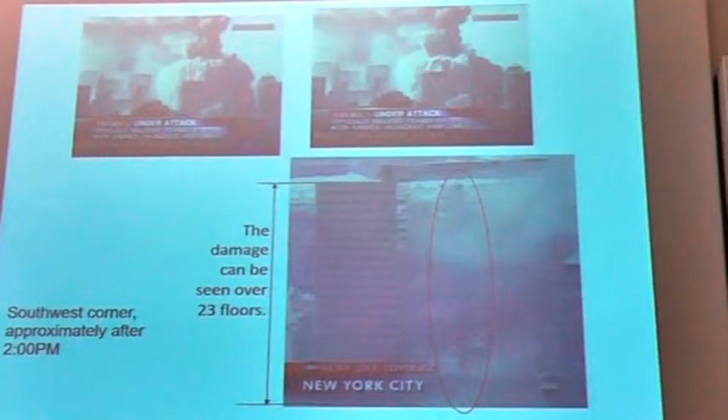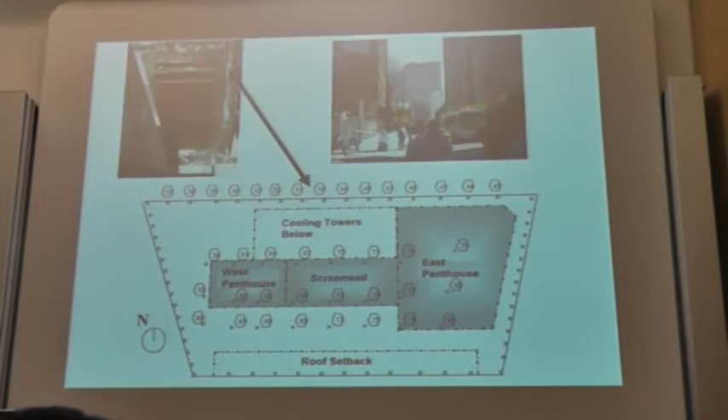So there again is another picture. This is the top of the building. You'll see here, this is the North Tower - so what you're looking at is the North Tower down here, this is the World Trade Center. In this view, you're looking towards this elevation, and you can see the east penthouse here, at the top there.

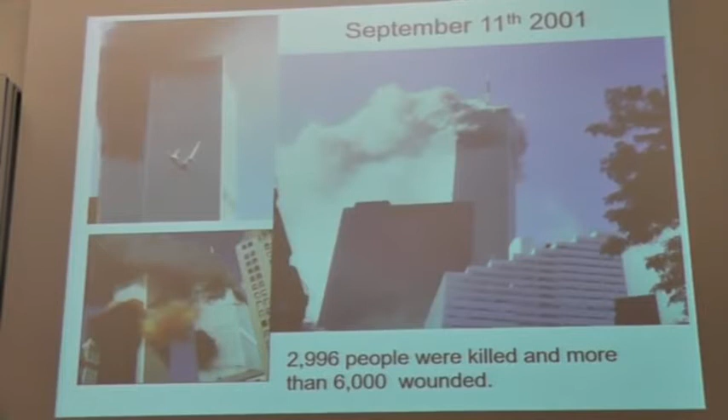So of course, September 11th, 2001. Those that are old enough can remember that awful day. Just short of 3,000 people died, and more than 6,000 people were wounded as the planes were deliberately crashed into the two towers.

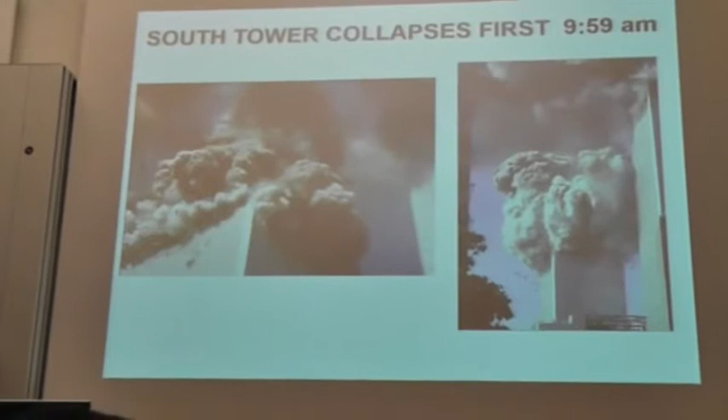The South Tower, which is the furthest one away from World Trade Center 7, collapsed at 9:59. This is classic progressive collapse, where the building all comes down in one go, and we'll talk about progressive collapse as we go through the presentation.

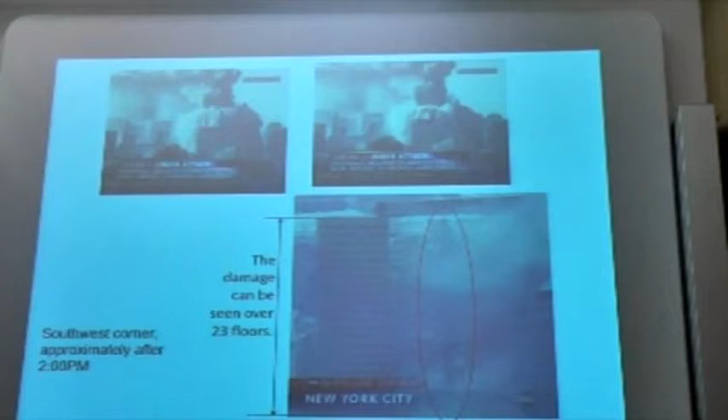Not many pictures were available of the damage to World Trade Center 7, but you can see here the North Tower as it came down gouged through World Trade Center 7. That was the structural damage you see there, which can be seen over 23 floors. It then obviously caused a fire, and the fire burned for 7 hours.

It was a classic travelling fire. We will look closely at where the fire started and how it travelled throughout World Trade Center 7.

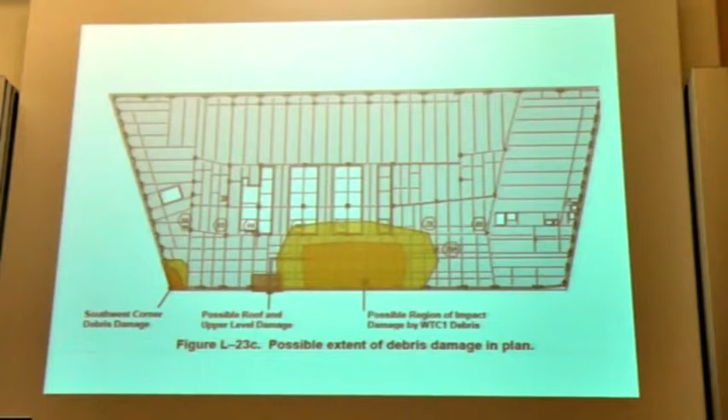If you look at the plan of World Trade Center 7, this was the North Tower, World Trade Center 1. This was the extent of the damage we could find, with damage on the southwest corner. That would not cause collapse—it was superficial damage, but it did start the fire.

Debris from the collapse of World Trade Center 1 at 10:28 ignited fires within World Trade Center 7. These were standard office fires—there was no jet fuel, only superficial structural damage that started the office fires. The fires travelled through the building for 7 hours, and collapse occurred at 5:20 p.m.—the only known case of a high-rise building collapse due to fire.

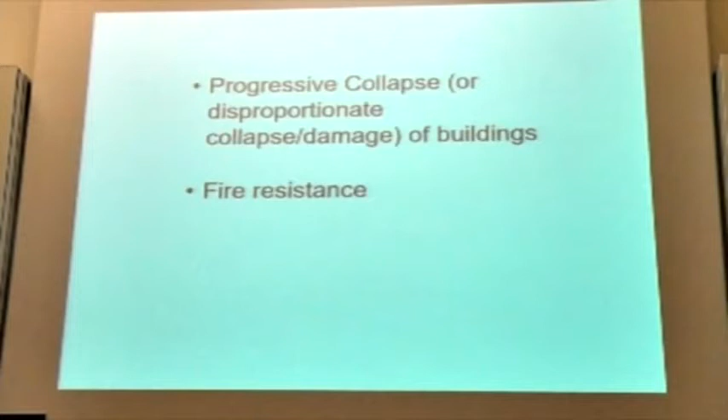To explain what happened, we need to consider two things: progressive collapse, which I mentioned earlier and will now go into in detail, and fire resistance. Progressive collapse, sometimes called disproportionate collapse, means that if part of a building is damaged, it causes the rest of the building to fall down.

So I'm going to start with progressive collapse, go back to World Trade Center 7 to put that into context, then come out and talk about fire resistance and its background, before returning again to World Trade Center 7.

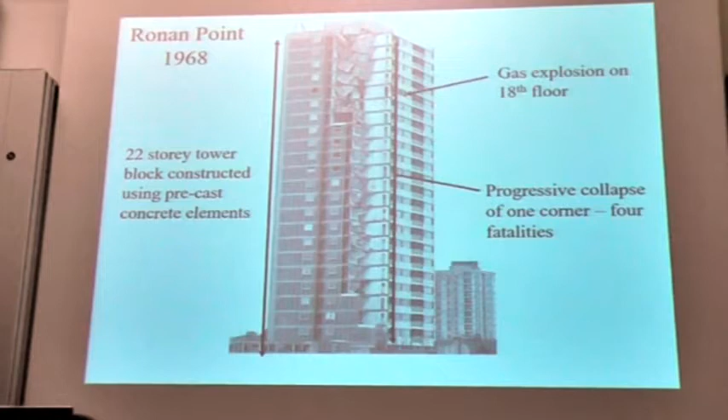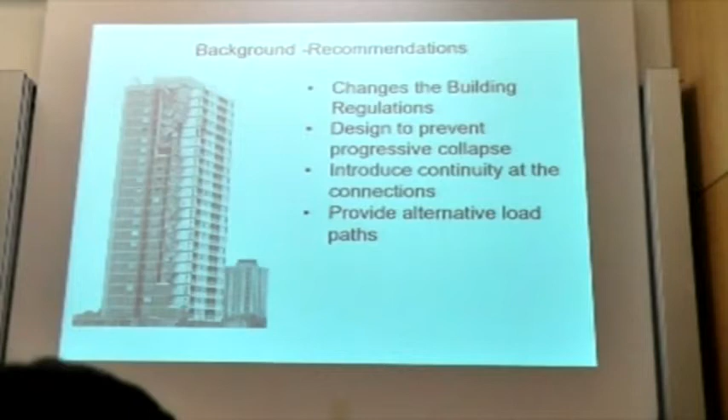How do they do it? You introduce continuity at the connections, or you provide alternative load paths. Basically, what you're trying to do is put redundancy in the system, so that if there's a failure of a part of the building, the rest will not fall down - a failure of a part of a building will not result in overall collapse.

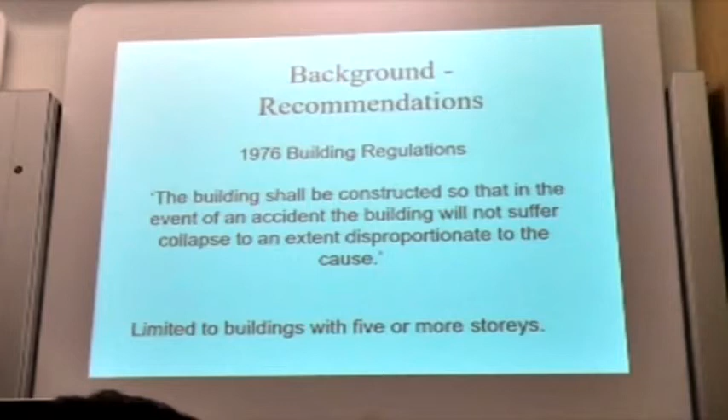In 1976, the building regulations - those of you who are old enough, this was called the Fifth Amendment - said the building shall be constructed so that in the event of an accident, the building will not suffer collapse to an extent disproportionate to the cause. That's why it was classed as disproportionate collapse, progressive collapse, i.e. if one member in your building fails, the rest of the building does not fail. It was limited to buildings with 5 or more stories.

This resulted in what we class as robustness or redundancy in the system. If we go to the building regulations now and the approved documents, they basically say that the building should be constructed so that in the event of an accident, the building will not suffer collapse, etc. If you follow the approved documents, you make sure you comply with that building regulation. You've got 3 ways that you can do it.

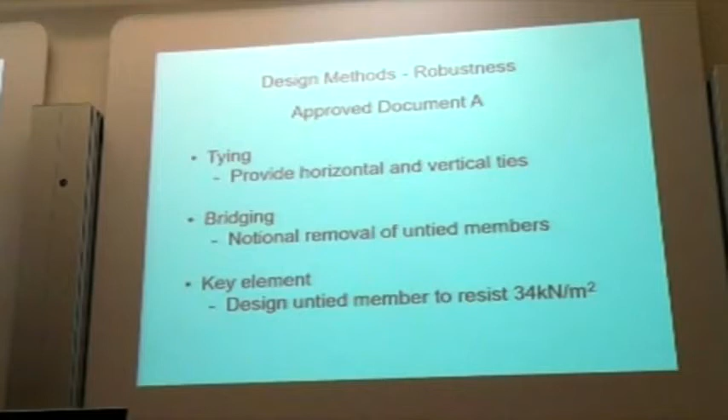One is tying, where you provide horizontal and vertical ties. Another is bridging - if you lose an element, or lose a column or part of a building, you bridge across with the rest of the structure. Or you design a key element - an untied member to resist 34 kilonewtons per metre squared. The engineers in here will know that's a massive load. I've only done it once on one building, and it cost a fortune.

Let's take those in turn. Tying design methods - so this is a floor. Typically it might be a composite slab where you put concrete, this is a metal deck, this is a steel beam, this is a steel column. The idea is you look to see whether you can tie these together so that if there's any damage, they're all actually tied together.

Remember, go back to Ronan Point - the walls and the floors were not tied together. So when there was a disturbance, an explosion, they came apart, and then the rest just fell down because they weren't tied. This gives you an example of how it's worked.

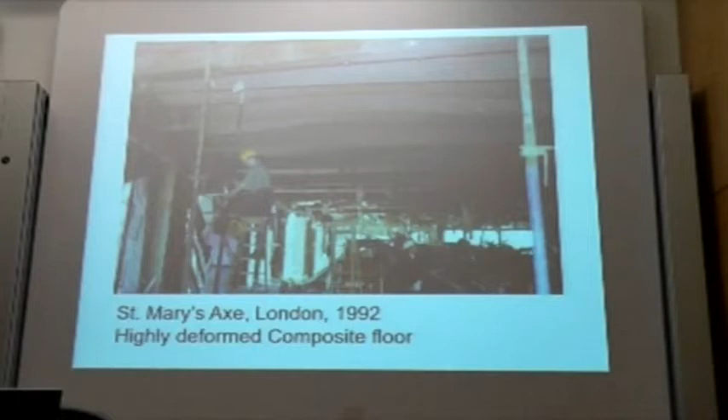This was a building in London that was subject to a terrorist bomb in '92. You can see the tying effect of the beams, that the structure has remained in place. This is a picture of my old boss at BRE, but you can see that this structure has actually performed very well.

Round the corner here is a building I designed, and that shows a bit of my age as well - I designed it with a key element. I'll come back to that in a minute.

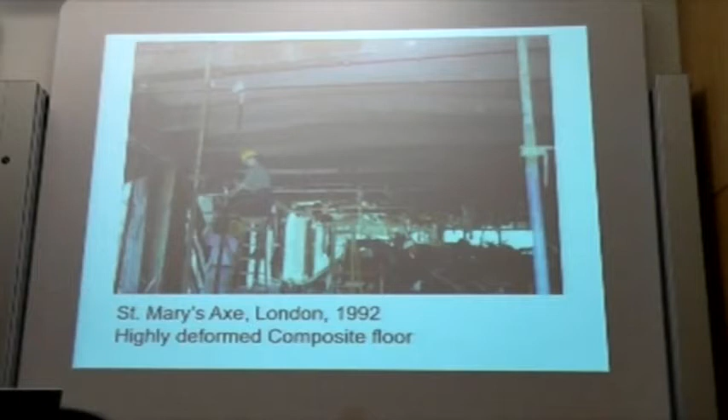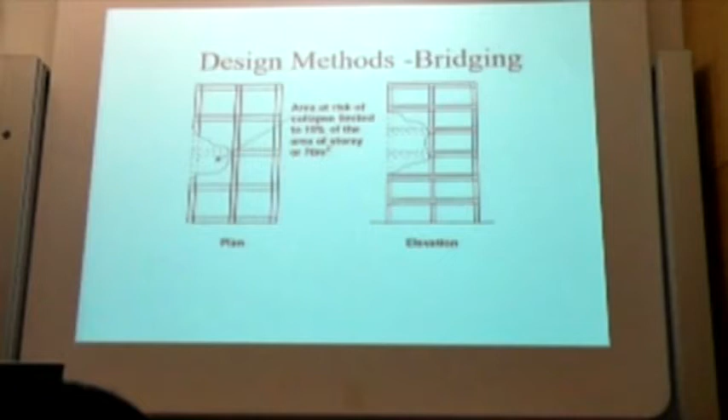On key elements, you can design an element anywhere for a pressure of 34 kilonewtons per metre squared. This has come from a flank wall gas explosion on Ronan Point - someone came up with that figure and it stuck as a key element. Put that into context, the floor we're standing on, or an office floor, is typically designed for 2.5 plus 1 kilonewtons per metre squared. So you can see that if you're designing for that, you need quite a big structure. It's used to determine a notional load applied to the key elements. It's not actually related to a gas explosion, even though historically that's where they say it's come from.

So that's the rules in the UK followed in Ronan Point. Let's go back to the US - progressive and structural collapse. The building codes lack explicit structural integrity provisions to mitigate progressive collapse.

So in the US, they didn't have any of these rules, so it wasn't designed for progressive collapse. Federal agencies say they've developed guidelines to mitigate progressive collapse and routinely incorporate such requirements in construction of new federal buildings, but that wasn't the case for World Trade Center 7.

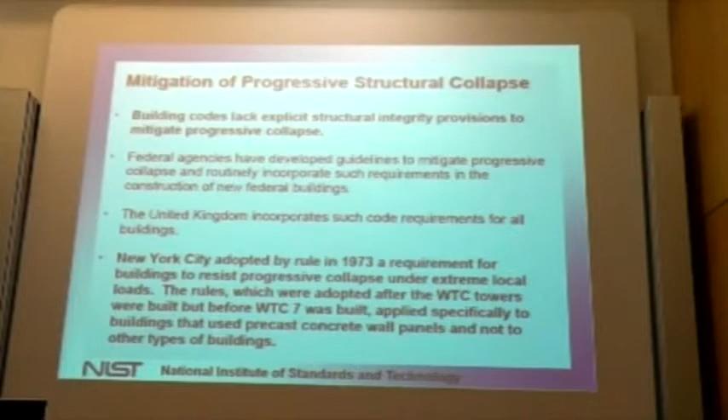The UK incorporates these within our practice, I've already shown those. New York City adopted a rule in 1973 requiring buildings to resist progressive collapse under extreme local loads. That sounds good, but the rules, adopted after the World Trade Center towers were built but before World Trade Center 7, applied specifically to buildings using precast concrete wall panels - not World Trade Center 7. So World Trade Center 7 was not designed for progressive collapse.

What does that mean? Let's go back to how World Trade Center 7 was built. Here you've got the steel structure, built over a power substation, which meant we needed structures that would transfer loads across the structure.

The area of interest is between the 5th and 7th floor, where we had a number of cantilever trusses and some very big trusses. Why do we have the trusses? You can see the columns coming down, but the load was being transferred not to a column directly underneath - there was no room for that, remember there's a power station underneath - but to a column going either side.

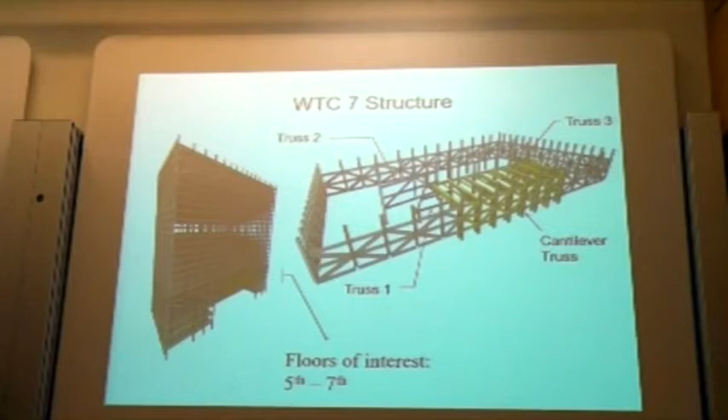There were 3 big trusses - truss 1, truss 2, truss 3 - and cantilever trusses distributing load across the structure. They were not designed for progressive collapse, so if any of those are hit at all, we're in serious trouble. There's no redundancy, no tying, no bridging in the system. So if anything hits that structure, we are in trouble.

You can see that in more detail - column 79, I'll come back to that, column 80 where this truss is, column 77. These are big transfer trusses here, then cantilever trusses going out there. No redundancy in the system, so if anything starts to hit those, we are in trouble.

And if anything starts to hit those, we then start to have horizontal progressive collapse, and we'll look at that in more detail as we go through.

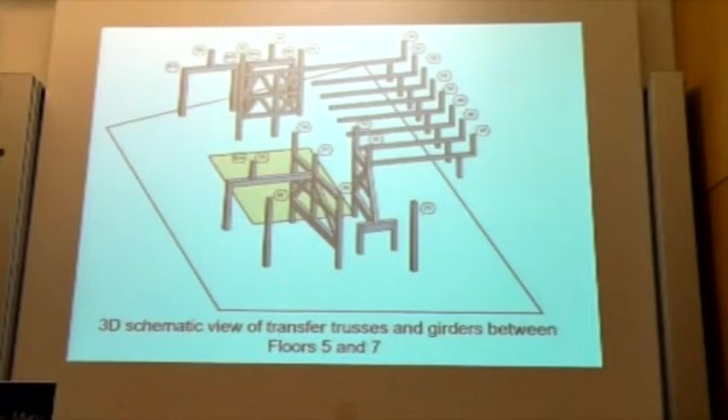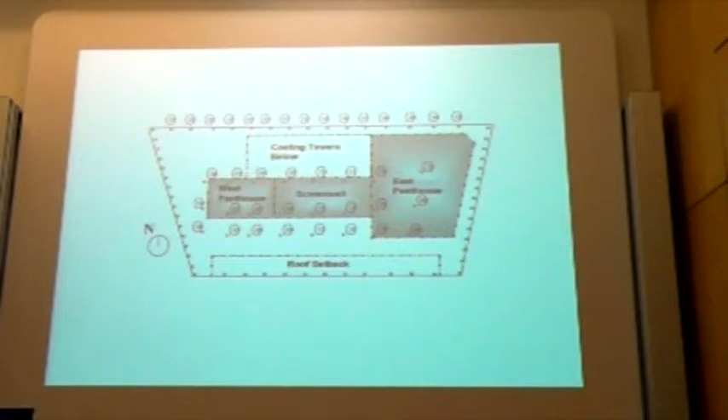So you can see this is the area we're interested in. This is a big girder, a steel beam - though non-structural engineers would just call it a steel beam, very deep, that's why we call it a girder. This spans 45 foot, in UK/EU money 13.7 metres, and 52 foot in the other direction.

This is an interesting layout - you can see the beams going perpendicular to this girder and then going in the other direction on the other side. Very important when we come to looking at this in fire.

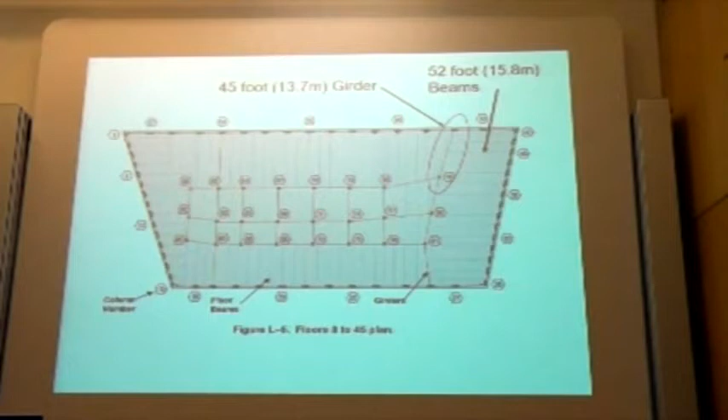At the moment we're looking at progressive collapse and initiating events. So we've got column 79 - anything that happens around here and starts to collapse in this area and then hits this, we've got problems, because these have got no redundancy whatsoever. If this starts to collapse, it will just go bang, bang, bang, bang, bang, horizontally right across the building, and then the whole thing comes down.

Okay, so that's progressive collapse. So just remember when we're there, we're looking at this area, the initiating event. As soon as something fails here, there's no redundancy. In the UK, we would never design them like this. We would put a lot of redundancy in these trusses.

Once it starts to locally fail here, hits these structures, it's horizontal progressive collapse right across those trusses. Once you've got there, the whole building then just comes down. And what you're actually seeing is the outside of the building coming down. The inside's already gone in this area and then across there.

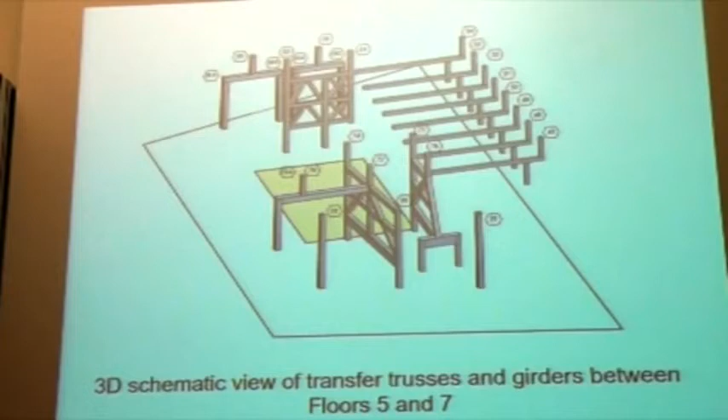Okay, so progressive collapse, hold on to that. So that shows where the initiating event happened and then what actually happened afterwards as you went through the progressive collapse. We now need to go back and look at fire resistance because we need to look at the initiating event. So remember, this was 7 hours after. So I'm quickly going to take you through fire resistance, and I'm going to go back to basics because then I can put that back into context into the World Trade Center 7.

So, fire engineering or structural fire engineering, why do we design structures for fire? This is where I spent a lot of my research work. We could go right back to the Great Fire of London in 1666, and then the first legislation was really the Building Act 1667. Houses were to be built in brick or stone instead of wood, and the number of stories and width of walls were carefully specified so that you had space between the buildings, looking for the spread of fire. And streets wide enough to act as a fire break.

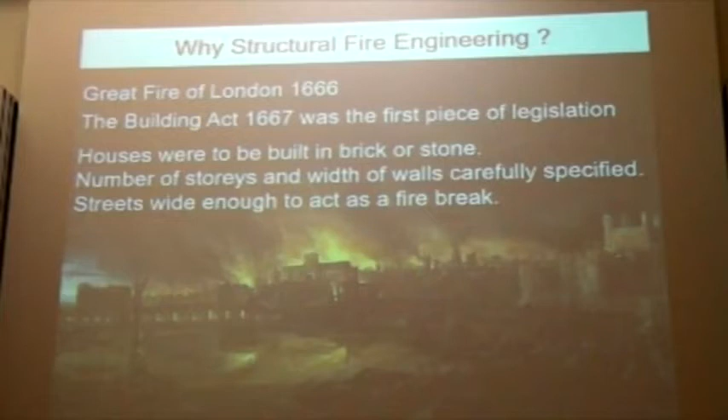So, structural fire engineering, this is my definition, is the science and art. Engineering is all about art as well as science. It's the science and art of designing and constructing with economy and elegance buildings, frameworks and other similar structures to protect people, property and the environment from the destructive effects of fire.

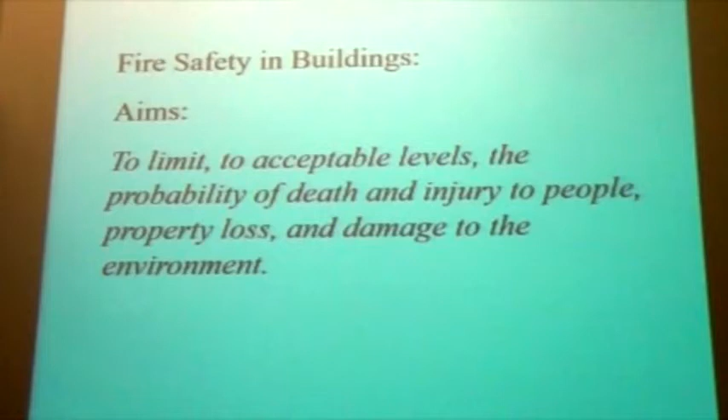So, fire safety in buildings, the aims, to limit to acceptable levels - remember this, acceptable levels - the probability of death and injury to people, property loss and damage to the environment. People, we're talking about occupants, firefighters, public in the proximity of the building. Property loss, there's a lot of issues about loss of business, so when there's fires in buildings, it actually leads to whoever owns that building a loss of business and going out of business in some cases. And damage to the environment, where we're looking at emissions of gaseous pollutants and runoff of water we might use to fight a fire.

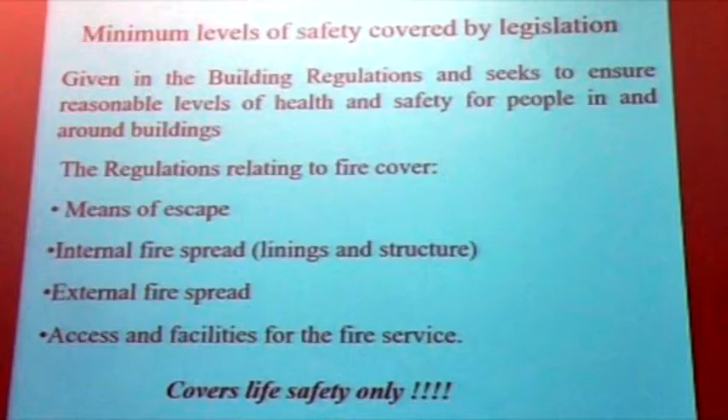Minimum levels of safety, which is life safety, is covered by legislation, not property loss, life safety. And they're given in the building regulations, and there's been lots of talk about building regulations recently, and it seeks to ensure reasonable levels of health and safety for people in and around buildings. The regulations relating to fire cover means of escape, internal fire spread, linings and structure - that's what we're going to look at because that's the structure part of it - external fire spread, access and facilities for the fire service. And it only covers life safety because that's the minimum levels of legislation.

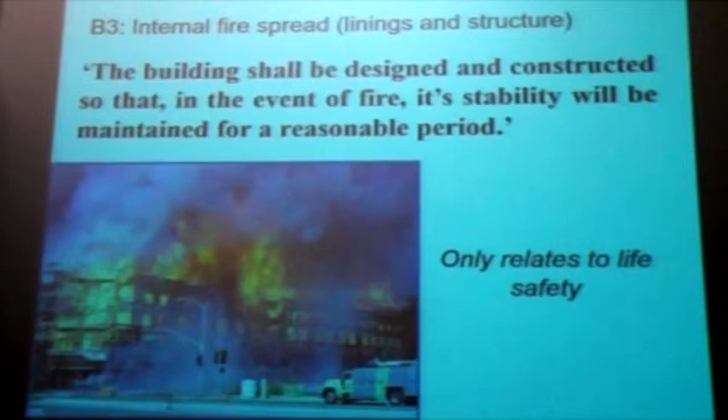So if you look at the British building regulations, you'll see it as B3, and we've got internal fire spread, linings and structures, and it says, this is the regulations, this is what you've got to achieve. The building shall be designed and constructed so that, in the event of a fire, its stability will be maintained for a reasonable period. That's the building regulations.

Now, there's a number of ways that you can make sure that you comply with the building regulations, and the obvious way in the UK is to use approved documents, and that's approved document B. People get confused because the approved document B is about this big, and they think that that's the building regulations. It's not. That is the building regulations, just that statement.

You can address the building regulations a number of ways. One is through Approved Document B, which is classed as a prescriptive approach, which basically says you shall construct this building this way. That will give you things classed as fire resistance, travel distances for escape, the size of your compartmentation, etc.

But you can approach it a different way, which is a performance-based approach, which means you can look at the way the structure really behaves under a real fire and how the actual structure itself will perform. That's why it's called a performance-based approach.

With the building regulations you can actually go between the two, but you're going to have to take a lot of care. You'll see that with the review of the building regulations at the moment, where people will perhaps jump between the two without really understanding what they're doing.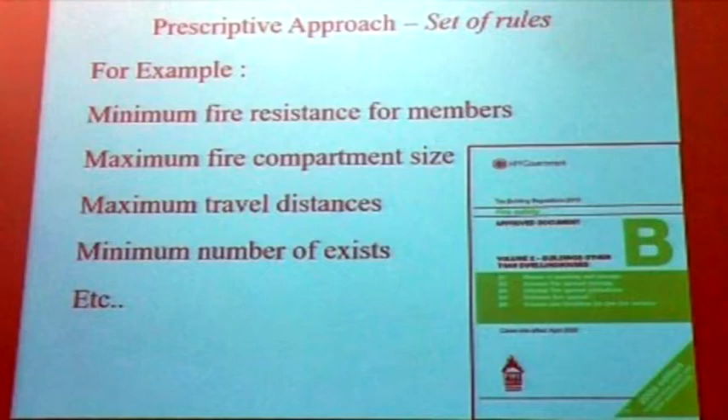So let's look at the prescriptive approach, set of rules. For example, minimum fire resistance for members—this is looking at structures, and I'll come to that in a minute. You have a minimum fire resistance, minimum fire compartment size, minimum travel distances. So if there's a fire in here, we've got travel distance to getting out of the building. All these are specified—minimum number of exits, etc.

So what I'm going to talk about is the structural side of it, which looks at minimum fire resistance for structural members. If we go to Approved Document B, first of all it states a fire-resistant period time, based on the height of a building and the occupancy of a building. So if you took offices, for an office under 18 metres, you must have 60 minutes fire resistance.

What does that mean? I've seen senior engineers stand up and say that means the building will survive 60 minutes in a fire. No, it doesn't. And I saw senior engineers stand up after the World Trade Center and say these had 2 hours—we're talking about the towers—2 hours fire resistance, they should have lasted 2 hours. No, it doesn't mean that.

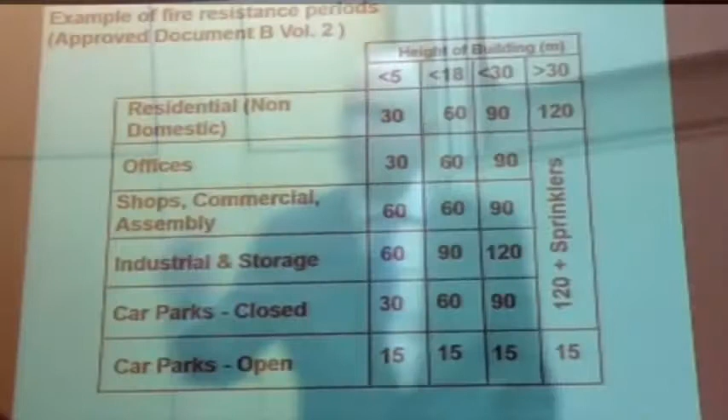It's a total misunderstanding. What it actually means is that the elements of your structure will last 60 minutes in a standard fire test. It means nothing else. So what is a standard fire test? It's a furnace and it follows a standard temperature time curve, and that's it.

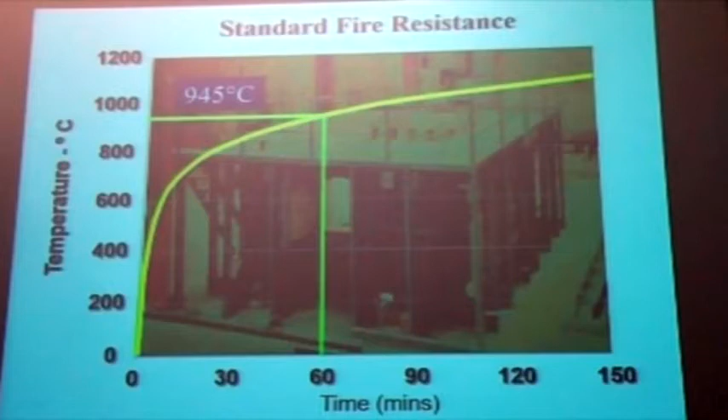You can see it there. So for 60 minutes we will reach a temperature within the furnace of 945 degrees. And we will look for a structure's load-bearing capacity, making sure that the load—so if you put a beam or a floor within a furnace, you put a load on it—make sure that it resists the load for the duration of the test.

As soon as you hit 60 minutes, you take the load off because it's hydraulic load—pass the test. Insulation means if it's a floor or a wall, the side that's not exposed to the fire must not increase its temperature by a maximum of 180 degrees, or an average of 140 degrees over the area. And integrity means that flame can't come through the walls or the floors. That's the criteria—they're the standard fire tests.

For a column, 3 metres. For a wall, 3 metres. For a beam, 4.5 metres. And for a floor, 4 metres—and the floor looks a bit bigger than that in here. But that's a standard fire test, that's what you're testing.

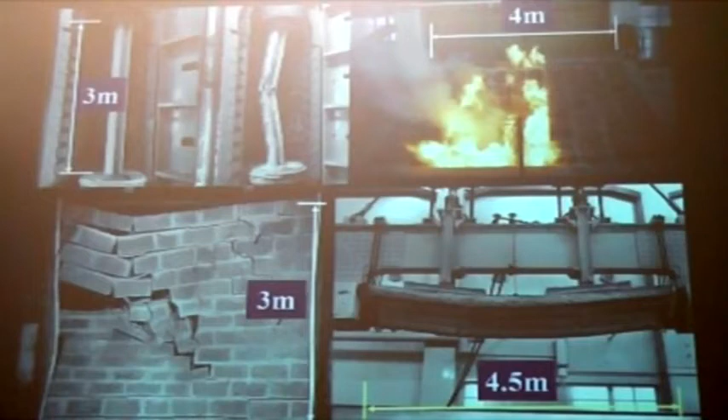History of the standard fire test—you can go back to the 1890s. On the behest of the insurance companies, they wanted to look at how structures, or parts of structures, actually behaved. So the early attempts at establishing structural fire behaviour were made at the behest of the insurance companies. 1917 was the first US standard, 1932 the BS standard, and then you can see the US ISO come in and then the Eurocodes. 127 years of testing and still going.

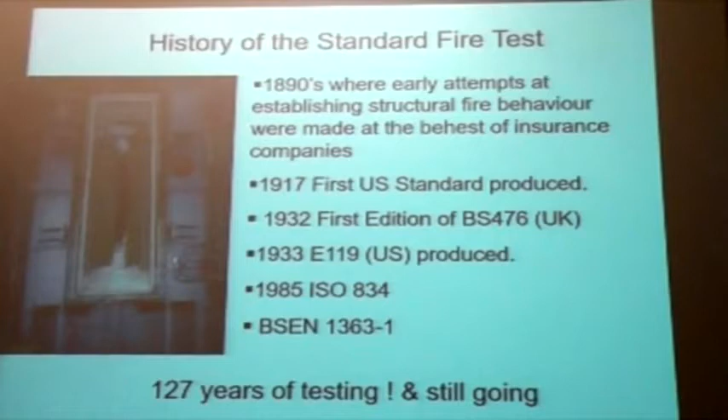What does that mean? It means we're actually ignoring what happens in real life, and all we're concentrating on is what happens in the standard fire test. And then people start to play games.

If I need a fire certificate for a fire door that requires 60 minutes fire resistance, I want to design that door so it achieves 60 minutes fire resistance. I don't want to design it a bit thicker so it achieves 62 or 63 minutes, because then I'm not competitive. And of course, I only need one fire certificate, so I can test this 6 or 7 times and just get over it.

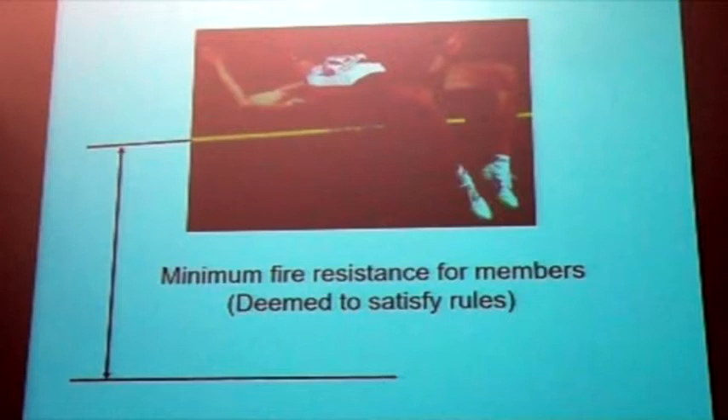I've seen tests where I've designed large-scale tests with 60 minutes protection on the walls, the plasterboard, following the standard fire curve, and at 60 minutes we can just watch it peeling off. It's done what it said on the tin. But actually the fire was carrying on and no one's putting it out. So you play games, and that's what's been happening - you play games just to pass the fire test.

Of course in the fire test, you carry these out in the lab. It's nice, got a nice lab coat on, it's nice and dry. This is a steel beam with intumescent paint on. Intumescent paint is nice because it looks like a paint, but when you start to heat it, it chars. And when it chars, it will insulate the steel, because steel loses strength and stiffness when it gets hot. This is nice - this is in a lab.

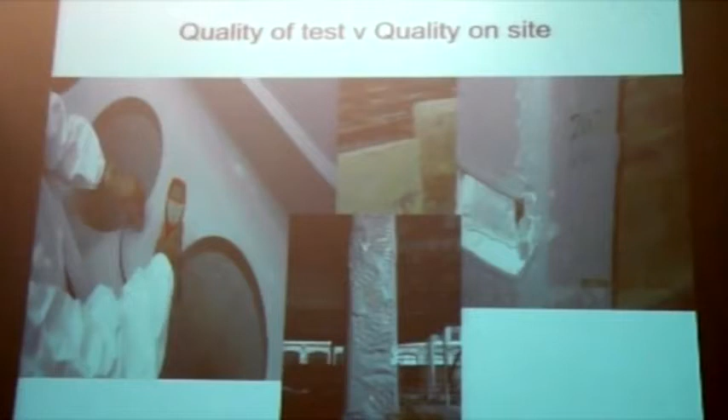This is going to go into a furnace. Testing the thickness, making sure it's absolutely perfect. This is intumescent inside - it's not cured properly. The quality of the test... reality. So you can see what's happening.

We're just focusing on what's happening in a standard fire test, and of course the limitations of the standard fire test. So that's the standard fire curve, you can see there. In reality, a fire doesn't follow that.

A fire will ignite, you get a bit of smouldering, you get a bit of flashover. A fire might start in the corner, and as soon as it hits the ceiling, it goes straight over in seconds, and everything will catch fire - that's called a flashover. You get the flashover, and it will start to heat up. You'll get to a point, and then it will start to cool down. The standard fire test just follows that curve to the point you finish the test, turn the test off, take the load off - you passed or failed that test at that time. So it's not a real fire, the standard fire test.

The standard fire test for a beam is 4.5 metres. We don't use 4.5 metre beams in buildings - we're up to 15 metres plus. So this is what we're testing, and this is what we're building.

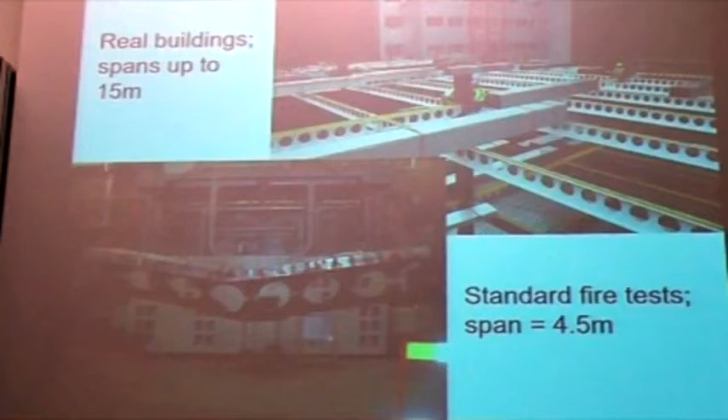And of course, limitations on the prescriptive approach - members within buildings, this is columns, this is floors, this is walls. I was lucky enough to work for the Building Research Establishment, and the Steel Construction Institute before that, and we actually built a number of full-scale buildings. You can see a person just standing there.

And then we set fire to them. Cool, did I have some fun? I don't know, is Tom and David here? Ah, David, my old boss. We had some fun, didn't we, David? And we set fire to these buildings, and another building.

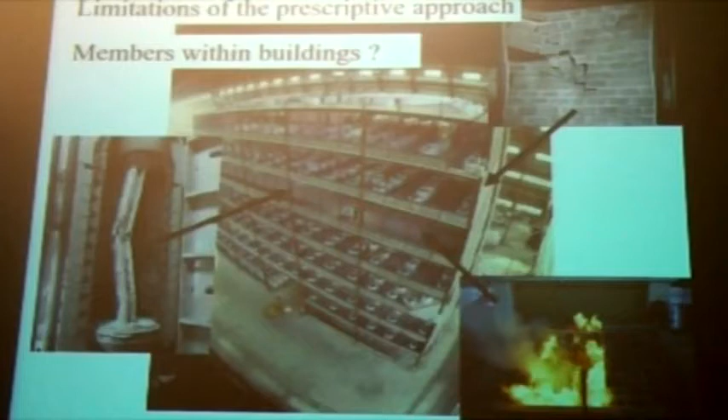But members within buildings - so you can see a column, standard fire test. Does this column behave exactly the same in a building? No. Floor - does this floor behave as it did in a standard fire test? No. And the same with a wall. So the limitation, the assumption we take if we follow the prescriptive-based approach, is that the members will provide the same level of performance, i.e. behave in the same way when they form a part of the building - which is incorrect. We know that as engineers.

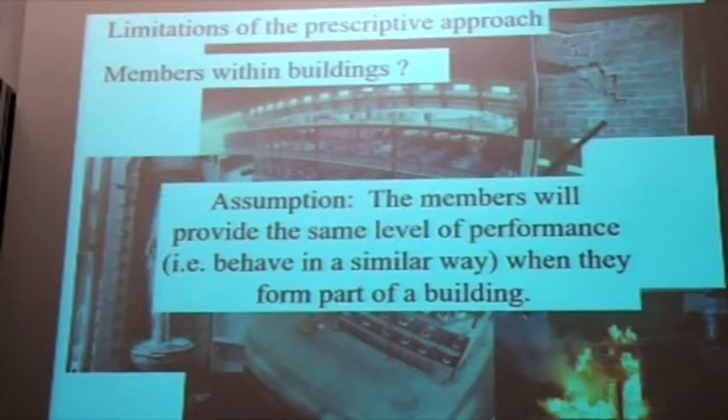As I said, and it's great to see David here, we built 2 buildings. This was an 8-storey steel frame building. There was a number of compartment fire tests. We were looking to see how the building behaved, and we were looking to see how it behaved with unprotected steel. Steel does lose strength and stiffness.

Typically for a fully loaded steel beam or steel column, if it's heated all the way around, you protect it to make sure it doesn't get above 550 degrees. Or for a beam, if it's got a floor on top, you protect it so it doesn't get above 620 degrees - that's a rule of thumb, I'll come back to that in a minute. So we were seeing how it would behave with no protection on the steel.

This is a concrete frame building, and we set fire right down at the bottom here, mainly because we didn't want to keep walking up and down the building, so we decided to set fire at the worst place, which was a compartment on the ground floor.

For the steel frame building, which I must admit was a great time working for BRE, maximum steel temperature went up to 1150 degrees, and all this data is on the website.

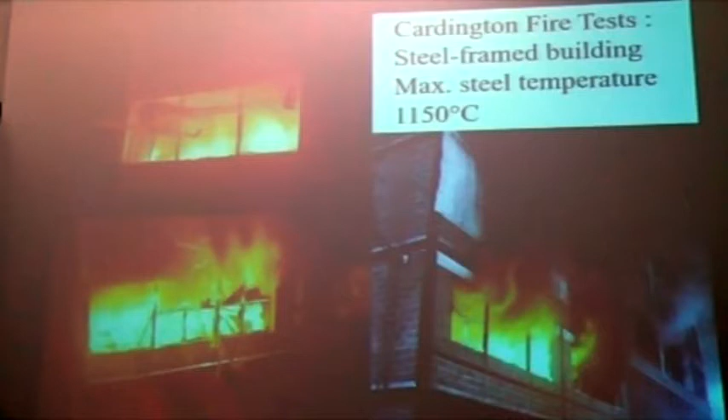All this data you will find on the one-stop shop that I set up in Manchester. BRE was kind enough to allow that data to be published, and you'll find it there. We haven't updated that website for a number of years. That was paid for by government at the time. I've left Manchester, but it's still on the website.

On the concrete one, we got up to a maximum atmospheric temperature of 950 degrees.

So then, going back to detrimental behaviour, you can see what happens in a furnace with a wall, but actually in a real building you've got the movement of structure around the wall as well, so you've got loads coming onto the wall which are not taken into account in the standard fire test.

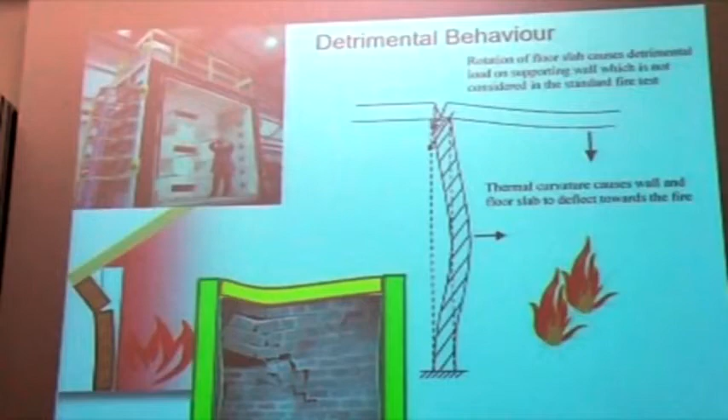You can see here where you get a fire within a compartment, deflection of the floor above, deflection towards the fire of the wall, and then different loads going onto the wall, which is detrimental to the stability of that wall - something you're not looking at in the standard fire test.

You can see some examples: these are compartment walls, we've got the steel frame, this is where the fire was, and this is starting to deflect. You can see the damage to the compartment wall, but as this has come down, it has put additional load on that wall to cause it distress.

You can see here there's a fire behind this wall, and you can see the damage to this wall, and you can just see some precast concrete planks as they move and put different load. You're not considering that in the standard fire test.

Other detrimental behaviour - this is the concrete building, and you can just about see a deflection here. This is where the fire was, and the movement of this caused additional loads on that column. This carried on moving as that fire started to cool.

We had all the equipment set up, and we could see the movement of this structure, and we were very concerned about it - remember, this is on the ground floor. In the meantime, the fire brigade that were there just in case anything happened were all lined up taking a photograph, because they thought the fire was out. We had to try to pull them away to say, no, you're actually in more danger at the moment than you were at the height of the fire.

You can see, obviously, the displacement and the distress to the bracing there as you've got movement of the wall on that side - again, detrimental behaviour. You're not picking this up in any of the standard fire tests, and you can see the movement there.

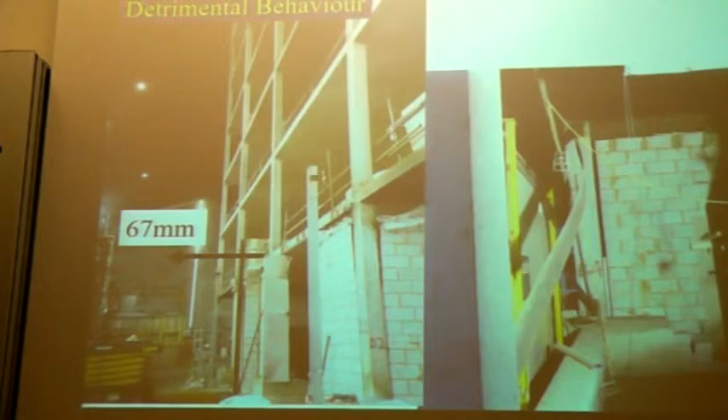So if we were looking at the building as a whole, we would need to ensure the building can resist or accommodate horizontal displacements. Other limitations.

I've already mentioned that this is the standard fire curve in the standard fire test, and this is the real fire, where you go through the cooling stage. You do not, in a standard fire test, consider the cooling stage of a fire, which actually is where a lot of damage is done.

So if you start to heat up a steel beam, the steel will obviously lose strength and stiffness. It will become plastic as it pushes against the connections, then it will cool down and try to contract from a plastic, permanently deformed state. So therefore it will have a lot of tension onto the connections, and it will start ripping the connections.

You can see here, this beam isn't in Cardington - this is another fire I went to. This beam's on the floor, it's fallen down. Here you can see bolts that have been sheared.

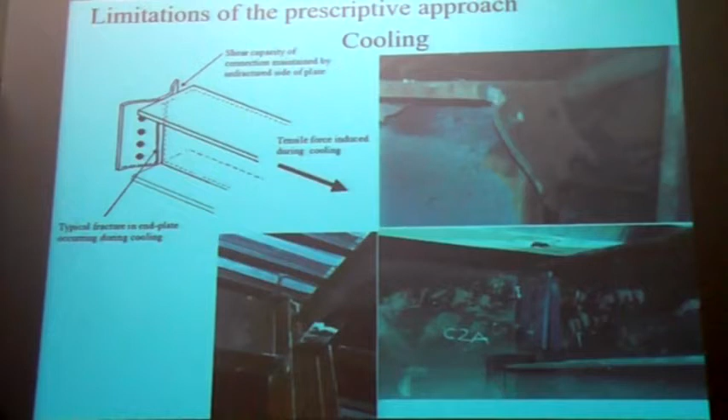Here you can just see that the connection has failed, and actually it's ripped down the side of the connection during the cooling stage of the fire, which is not considered in a standard fire test based on fire resistance and those prescriptive approaches.

Other detrimental behaviour - you can see in the floor the actual damage there.

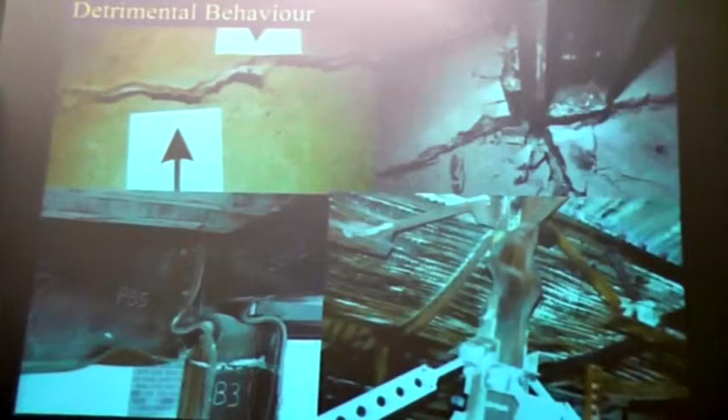You can see the column here. This is due to restraint of the structure above, not considered in the standard fire test. You can see all the damage around here, and again damage to the column here. So detrimental behaviour.

Going to the actual concrete building, you can actually see spalling here where you've got exposure of the reinforcements. So in concrete, of course, concrete's good in fire, it's a good insulator, but the steel reinforcement you use for tensile strength in concrete, you don't want those exposed. If you have spalling, i.e. the concrete starts to come off and you expose that reinforcement, you're in a bit of trouble.

Because of high compressive forces, i.e. the restraint of the rest of the building, that induced more spalling. So therefore the concrete cover fell off and exposed the steel frame. That is detrimental, you won't pick that up in a standard fire test. But that's all the detrimental stuff.

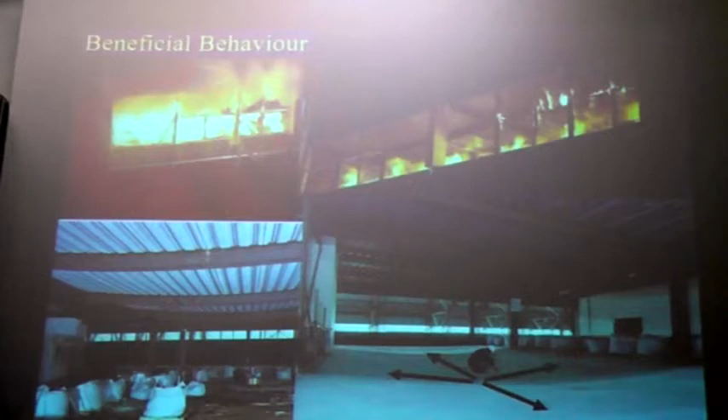There's also, when you consider real building behaviour, beneficial behaviour as well. So when you look at beneficial behaviour, go back to the steel frame buildings, you have what is classed as tensile membrane action. You will not pick this up in a standard fire test, where basically you're looking to see how the structure can perform in a sort of catenary action. This is what we class as tensile membrane action. I've done a lot of work looking at this, and a number of design methods are used in the UK to allow you to take into account that beneficial behaviour.

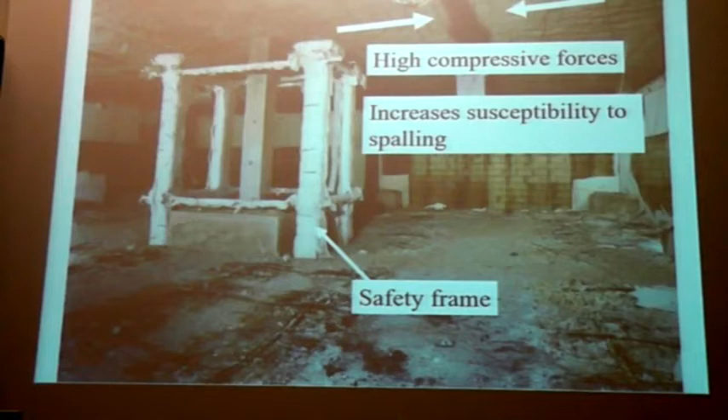I talked about high compressive forces. High compressive forces can cause spalling, but it also then creates compressive membrane action. Compressive membrane action is when you start to force against the restraint and actually start to lock in. And then, of course, that will give you beneficial behaviour.

So, going to the prescriptive approach, I've just taken you very quickly through looking at detrimental behaviour, beneficial behaviour. So, the prescriptive-based approach, based on a standard fire test, the advantages: as an engineer, it's actually quite easy to design something because you just use simple rules. You use simple rules, cover on reinforcement, protection to steel beams, and you use those simple rules. Experience has shown that the approach works.

I've just shown you loads of detrimental behaviour, beneficial behaviour, but to date, actually, we don't have buildings falling down around the world. Come back to the World Trade Center, but we don't. So actually it looks like it might work. An approach is easily understood by all parties because that's the approved document. Follow the approved document, follow fire resistance, everyone understands it. Fine.

Disadvantages: actual structural behaviour is ignored. So you're ignoring how it behaves in a real building. You're ignoring how fires really behave. So the effect of real fires is ignored. Level of safety and robustness are unknown. So if someone asks me, if you follow a prescriptive-based approach on fire resistance, how safe is this building? No idea, because all I've done is just follow a prescriptive-based approach. Optimum solution in terms of life safety, economical impact and environmental damage is unknown.

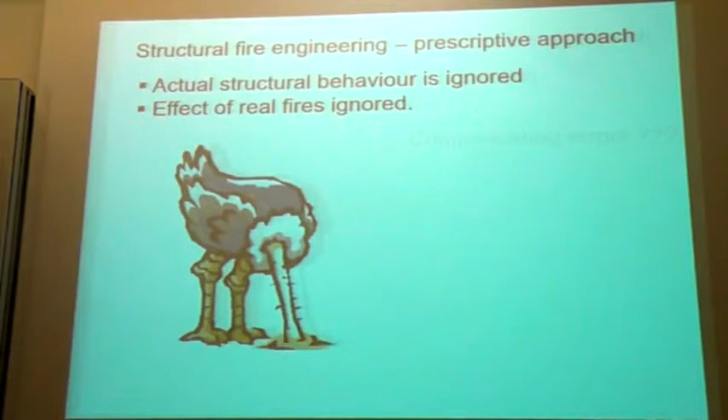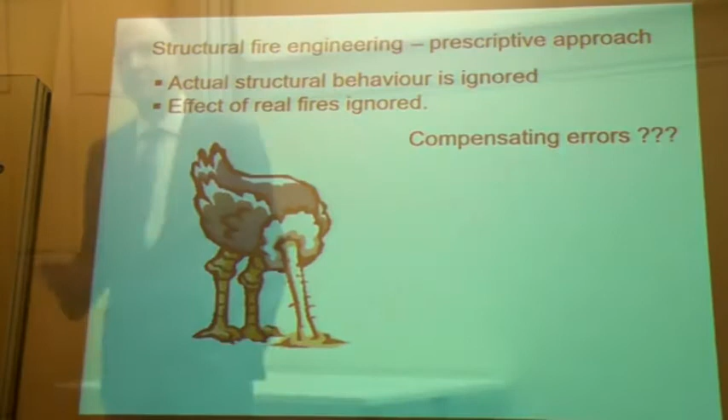But there is another way. You can go down a performance-based approach. And as engineers, you can start to look at the fire behaviour, real fire behaviour. You can start to look at the thermal response, i.e. how the structure heats up. And you can start to look at the structural response.

So on the fire behaviour, you could still keep the standard fire curves if you want, but start to look at loads and how things heat up. But you can then look at time equivalence, how real fires behave compared to your standard fire. Parametric curves, how real fires, zone models, CFD, travelling fires.

You can look as an engineer, you've got all the skills to do that. Thermal response, you can look at test data, but you can look at simple heat transfer models, or you can look at advanced heat transfer models. And structural response, even looking at members, you can look at the proper load on the member. Better way of doing it is looking at a frame or a part of a structure, or even better as a whole building behaviour in a fire.

That's a performance-based approach. So you start to look at real fires, the heat transfer, and the structural response. The advantages: it allows actual behaviour and robustness of the building to be assessed. So if a client asks me, how safe is my building? What robustness have I got in my building? I can start to answer.

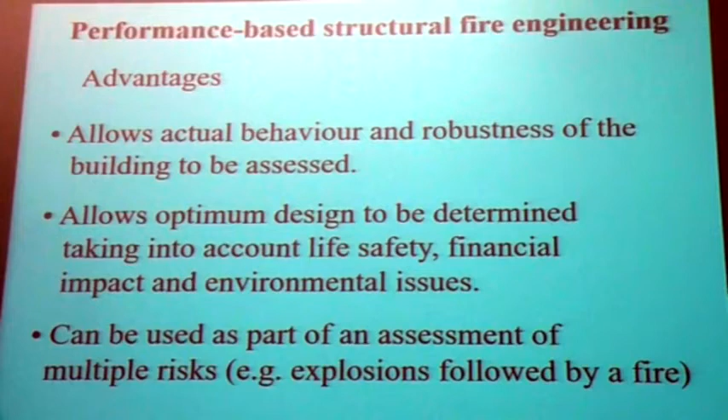It allows the optimum design to be determined, taking into account life safety, financial impact and environmental issues. So you've got the life safety, which is covered by your legislation, but you might want to put more robustness, more capability within your structure to resist the fire that might occur. It can also be used as part of an assessment for multiple risks, i.e. if there's an explosion followed by a fire.

Disadvantages: well of course it's much more complicated. You're not following a standard table or standard rules, you're actually looking at how the structure will behave, and the client may not want to pay for that. You usually find when you say, okay, I can do you a proper design, they say no, just what I need to get through building regulations. It requires multidisciplinary skills, the design can be complicated, which also means the design you put forward needs to be checked by someone else.

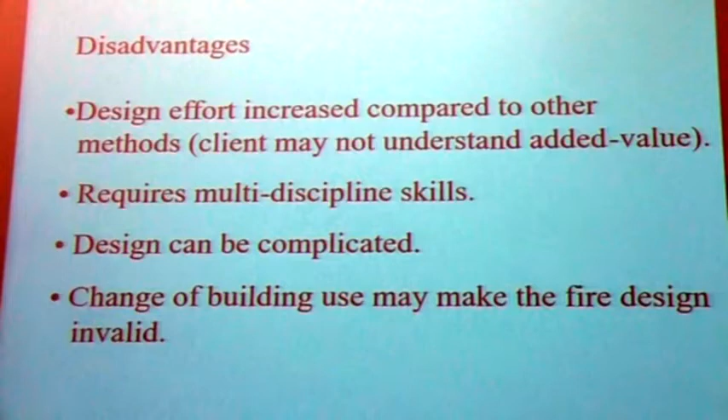And change in building use may make the fire design invalid. So if you design it for a fire and you change the fire load or the use of the building, that will change the type of fire that might occur.

But those buildings are based on a performance-based approach, to get the optimum design, but also the safest design. And actually, there is more fire protection placed on columns in those buildings compared to the prescriptive-based approach.

So, structural fire engineering: prescriptive approach is head in the sand, because as an engineer you don't know how this is going to perform, keep your fingers crossed. Performance-based approach gives a greater understanding of how buildings behave in fire, more robust designs, and more economic designs, because you design them properly to withstand fire.

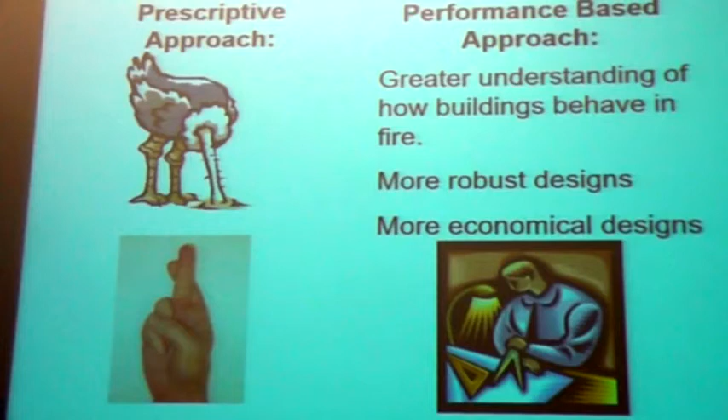Right, that was a quick run-through on fire engineering. Let's go back to the World Trade Center site. So, 47-storey office building again, just to remind yourself, we've already done progressive collapse. We are now looking for the initiating event.

Going back, we've got, as you saw before, the penthouse. We can see the kink here. The inside of the building has collapsed, hit that transverse structure, progressive collapse along there, and then that whole thing has come down. We're around this area, as I said before, column 79.

We're looking at the girder here, 45 foot, and the beams here 42 foot. Modelling was carried out by Arup, and we looked at the structure around this area in a lot of detail with different fire curves and fire analysis.

Going back to how this was designed, it was designed using the prescriptive-based approach, looking at how the parts of the structure perform in the standard fire test. The standard fire test in North America is slightly different, and I'll come back to that in a minute. Based on the standard fire test, fire protection was placed on the steel beams, steel columns, and the underside of the steel deck.

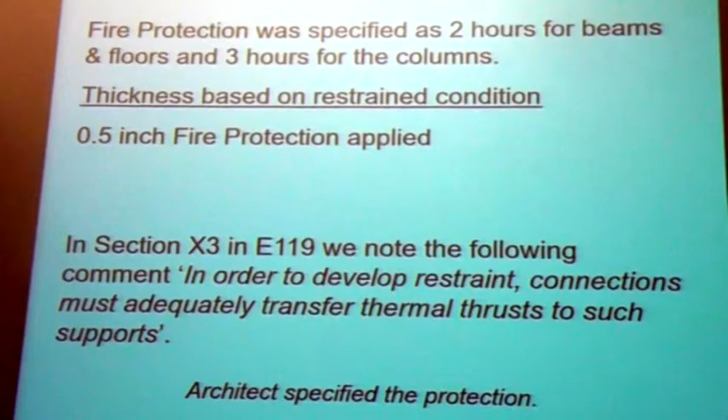So that girder - oh, I thought I lost everything there, I started panicking. So that girder there, look at the size of it as well, 13.7, needs to have thermal restraint at the ends, okay? And that's got half an inch in it.

The architect specified the protection. Structural engineer was nowhere near it. I'm glad someone laughed. So the architect specified the protection, not the structural engineer. No disrespect to architects. Any architects? No disrespect to architects. But you're not engineers.

So there it is, there's a specification. Minimum beam size, concrete, lightweight, normal weights. Minimum thickness, half an inch. Unrestrained beam rating was 1 hour. Restrained beam rating up to 2 hours. Required 2 hours, which meant it was restrained.

And as I say, typically in a fire test in America, you've got 3.7 and 4.8 metres. Remember the size of that girder. Right? So it's based on a standard fire test, achieving 2 hours, assuming that it was restrained.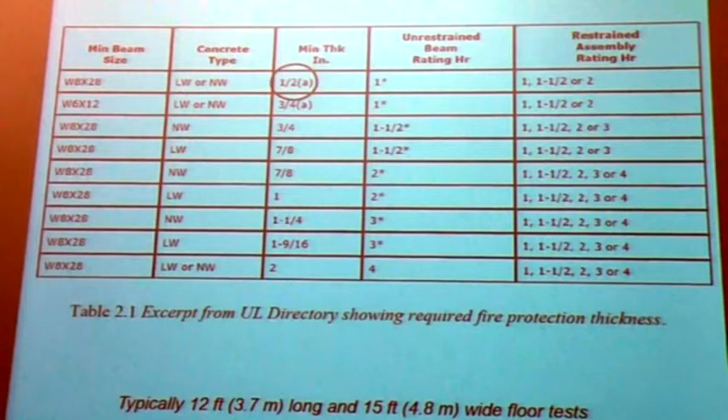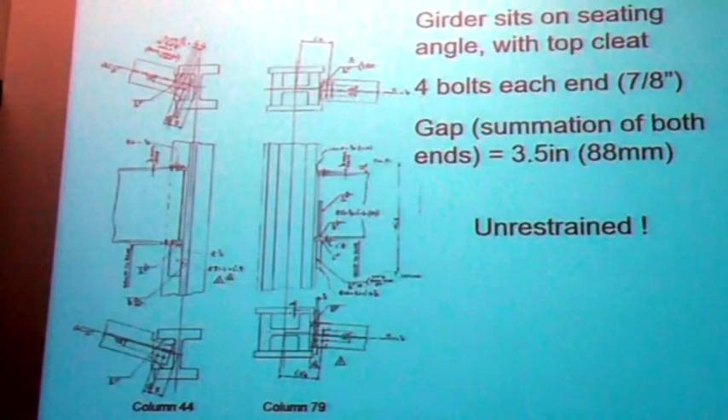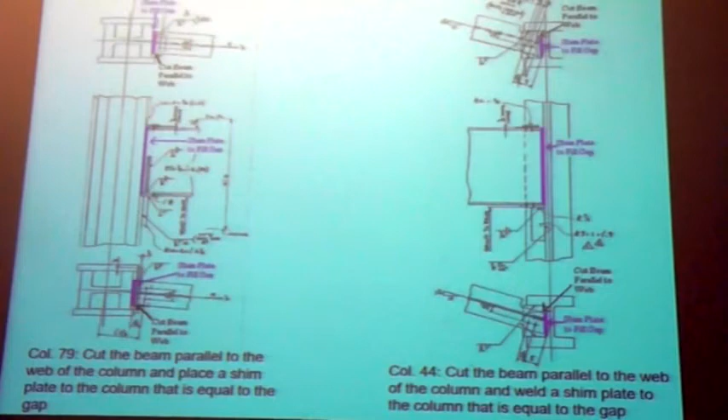So that beam is going to expand. It's unrestrained. And therefore, if you wanted that to be restrained, you should have put some shims down it to close that gap, following the code that said there should be adequate thrust at the end. So what's happening is that girder starts to heat up. You've got 4 bolts either end, each bolt is 7/8 of an inch. As soon as it starts to heat up, it's going to pin those bolts, and then that girder is just skating around on those angles.

Going back to the protection - it was a sprayed protection. There's a number of ways you can protect a steel beam. You can use things like brickwork or block work. A typical one used at that time was a spray. And when you spray these things, you spray everything else around it. The joke was usually, you should see some of the buildings in London where they sprayed fire protection and you spray half of London as well.

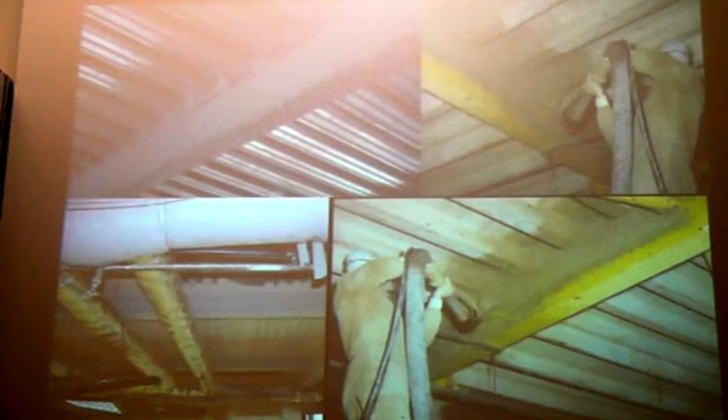But you can see the difficulty of this person holding this and spraying on this fire protection. So this was a sprayed fire protection, typically used. Nowadays we typically go for intumescents, but we still use spray protection. What I draw your attention to is that this is the underside of a floor, which is a trapezoidal floor. Fire protection is going on the steel beam; in some cases it goes on the steel underside. In North America it always went on the underside, so they put spray protection on the underside of the floor as well.

Between the beam and the trapezoidal deck, the beam goes across and there's a hole that's filled in with spray protection. You'll see why in a minute, but that's solidly filled in. So there you can see typically spray protection being put in on the steel beams. That's a picture of World Trade Center 7.

Look at it very closely. Look how neat the fire protection is here. Remember, this is supposed to be 1/2 inch - cool, they were keeping it at 1/2 inch. But look here, these are not filled in. Go back to the previous photo, you fill these in. Here, they're not filled in.

Why is it important? Done a lot of research on this. The Steel Construction Institute did a lot of tests where they looked at cases where these voids were not filled in. The reason why they were doing it is that if you had board protection, filling in these voids afterwards is a real pain and takes a long time. So they were seeing, well, if you had a beam typically set up like this but didn't fill in these voids, what difference would it make?

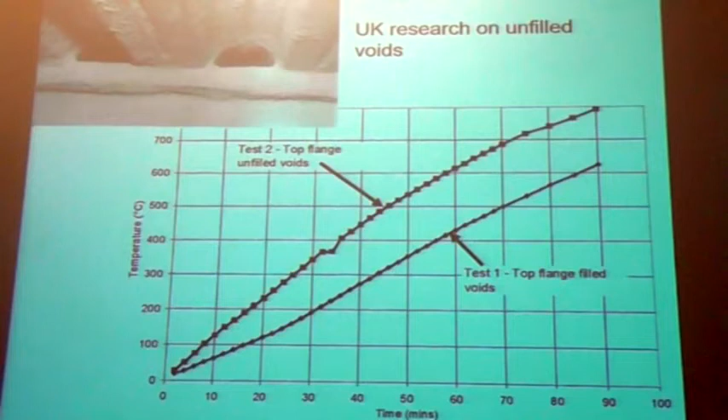Here's the difference. Test 1, top flange filled with the voids. You can see the temperature increase of the steel beam with time in standard fire testing. When the voids were unfilled, you can see that the beam heats up a lot quicker. So it makes a significant difference.

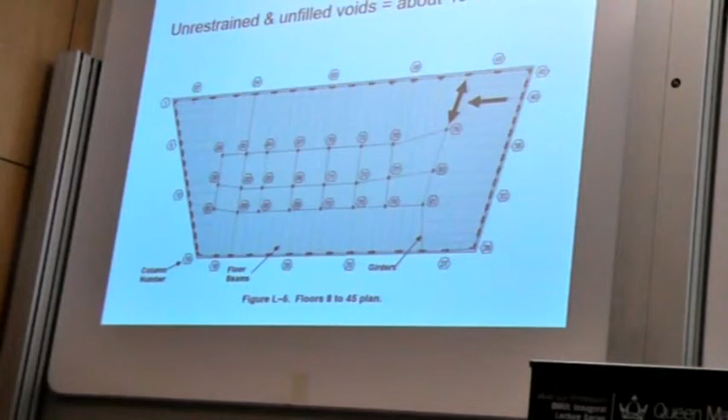So what we've got now is it was specified for 2 hours based on a prescriptive-based approach. Actually, that was assuming it was restrained. I think I've just shown it's unrestrained, which means if it only got 1/2 inch of fire protection on, it would only survive 1 hour in a standard fire test. And then they haven't filled the voids, so actually it would only survive 40 minutes. You're starting to get into very dangerous ground now on a standard office fire for this beam failure.

And that's what happened. You can look at the fire. People will come back and say, well, it was 7 hours. Yes, it was 7 hours, but that fire was a travelling fire. That fire was travelling through the building looking for the weak point. That weak point could have been in the first 10 minutes, it could have been 7 hours, it could have been 12 hours. The fire kept on going until it found a weak point, and then it came down.

Initiating event - it came down on that column 79, hit all those transverse structures, so you had horizontal progressive collapse, and then you saw the outside of the building fall.

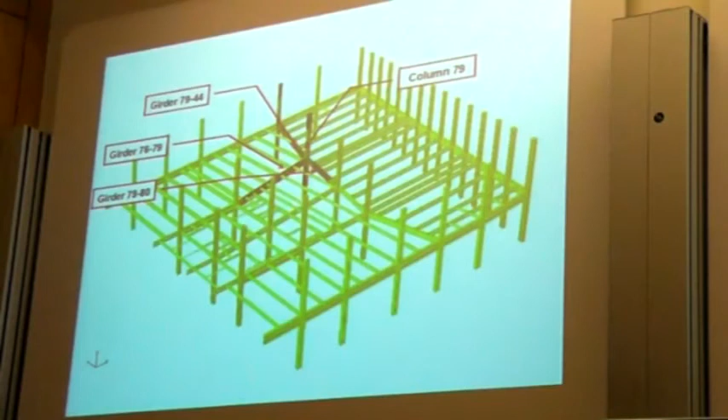If you look at the fire, which we've followed through all the photos we've got over those 7 hours, you'll see a number of cases where the fire is raging in this area, or the fire has just passed and you're in the cooling stage. No matter whether you look at a cooling stage or a heating stage of the fire, one is where the beam actually fails depending on the temperature of the office fire, or on the cooling stage where it's cooled off. Remember that girder was just skating around on those angles.

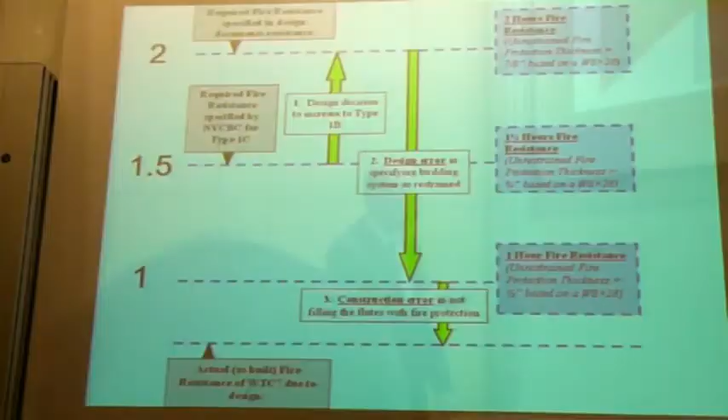So very quickly then, if you look at the fire resistance - I'll go through this quickly because you might not be able to see it at the back. On a building this size, on the New York Code, they actually said you needed 1.5 hour fire resistance. Someone decided in the design office to increase that to 2 hours. That's great, so they increased it to 2 hours - a design decision to increase to a Type 1B building, which was 2 hours.

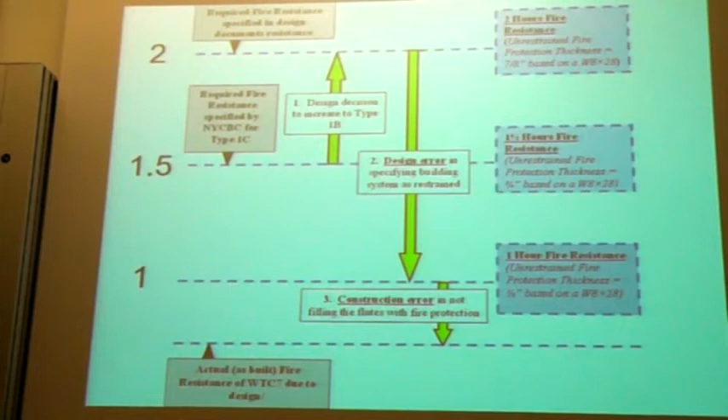They then specified wrongly that the building was restrained, and that girder was restrained - that design error dropped it to a 1 hour fire resistance. They then didn't fill in the voids, which was a construction error, which meant this fell to about 40 minutes fire resistance. And there you're in dangerous ground for a standard office fire to cause collapse. That's what happened - you can see the fire snaking around the building, trying to find a weak point, found a weak point, initiates an event, no redundancy in the system, no design against progressive collapse, the building came down.

Some of you would have seen the NIST report - the National Institute of Standards and Technology in the US, equivalent to the Building Research Establishment in the UK. They carried out a lot of work trying to understand what happened, and made one or two mistakes. On the girder, they didn't get the latest drawings, which had what we class as shear studs in it. That was unfortunate - the reason is there were no as-built drawings, so things were changed during construction, and you literally found a handwritten note on a drawing where they'd increased the shear studs. I can see the engineers in here because you're all nodding.

From that report, in 2008, this is recommendation 9. Remember, I've taken you through fire engineering - NIST recommends the development of performance-based standards and code provisions as an alternative to current prescriptive design methods, to enable the design and retrofit of structures to resist real fire conditions, including their ability to achieve burnout during the cooling stage without structural or local collapse. So they've said prescriptive-based approaches do not work - aim for performance-based approaches, and develop the tools, guidelines and methods necessary to evaluate the fire performance of the structure as a whole system. They're actually forcing the profession to look at real fires, real behaviour.

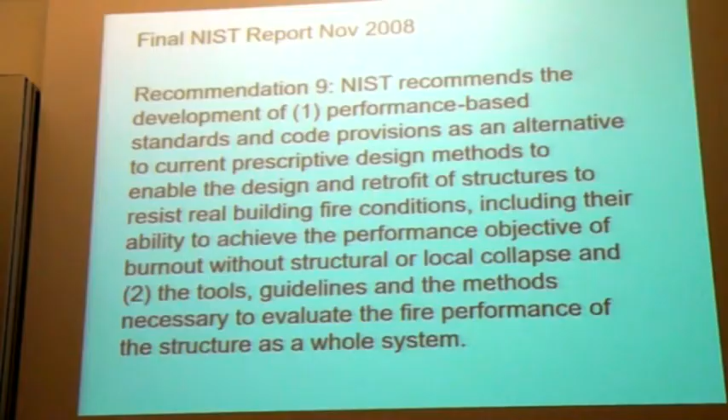That's their recommendation. What they should have done then is look across the pond to see what we've done in Europe - because if you look at the Eurocodes, they actually give design methods for the performance-based approach. What makes me frustrated with the States is that they could have used this as a foundation and built upon it. But no, they started from scratch, which was a shame because, as David knows, a lot of work has gone into developing these codes over Europe.

That, I hope you enjoyed, was a quick run through - first of all, on what progressive collapse is all about. I gave you, and I'm sorry if I went into too much detail, fire engineering and fire resistance, but then hopefully you can see what happened in the World Trade Center and why this building collapsed, which was basically because it was not designed correctly and there were construction faults which caused the building to collapse. Thank you.